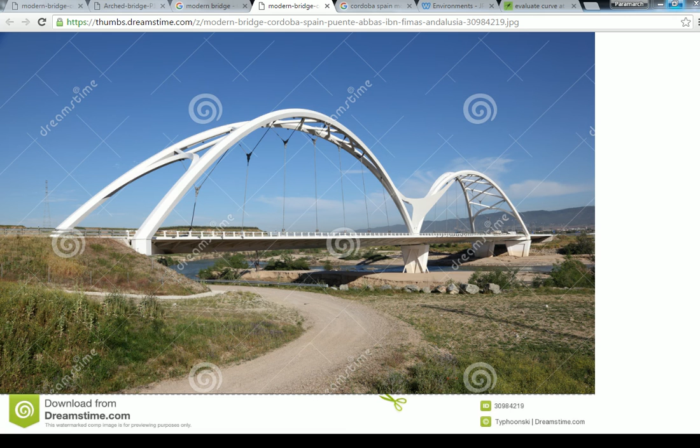All right, next up we are going to start doing the suspension cables. We're going to set it up to have that variable positioning function that we were talking about. So let's get started setting up that variable position. It's a centerline based function because only one point connects at the base.

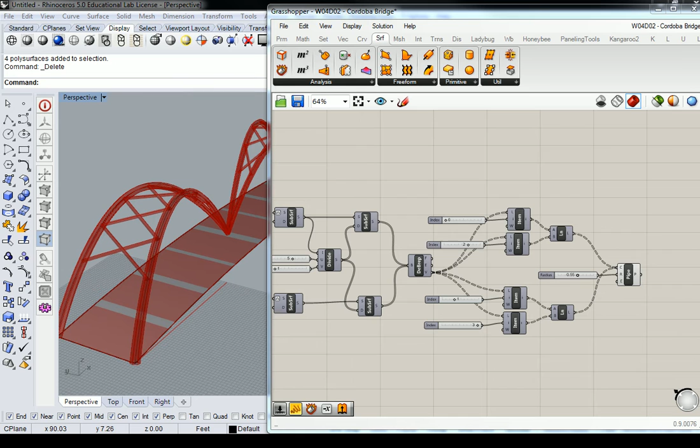However, you'll notice here that we basically have, from the previous exercise, some subdivisions. Notice how this subdivision has a center line. We could isolate it that way if you choose.

However, the reparametrization part is kind of key. So I could do a new subdivision, get both sides, and then reparametrize it and use the center line. Or I could isolate one edge, or one surface, like I did here, and reparametrize that, and then do my series of connection points along the edge that is the center line. Does that make sense?

I might have confused you, but it's going to look like this. If I'm going to use this particular surface, I'm going to use this one in this case, and I'll copy and paste and use another one for the other side. Jump over there - that one's not going to do it, this one will. So these are the two surfaces I'm going to use.

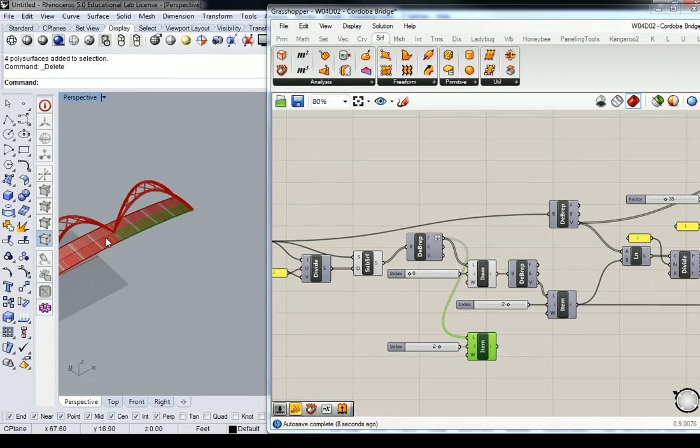For all intents and purposes, I'm going to use the origin side, and I'll call that the west, and I'm going to use the non-origin side, and I'll call that the east. I'm going to reference these surfaces and pull them down below so that I can separate my different ideas.

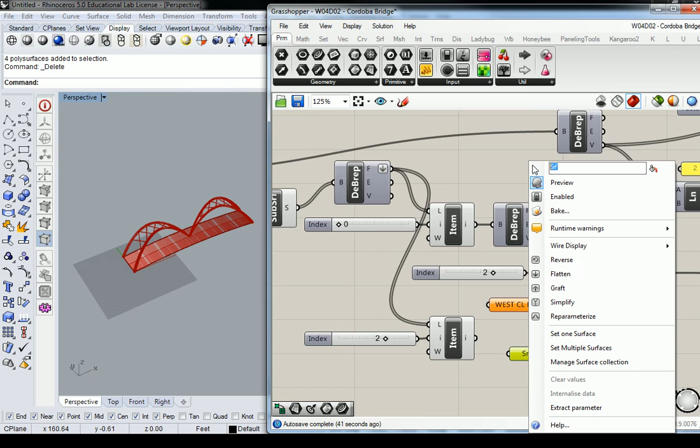So these params, I'm going to call west CL base, for centerline, and east CL base. The west one is this one here, and the east one is this one right here.

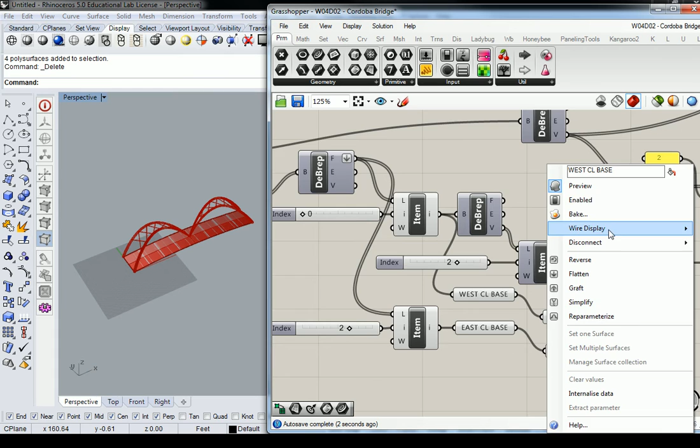And if you care to leave a copy of the information that's flowing out up top, you can. You just need to copy this and then reconnect them and make them wireless. It's a good habit to be in. I don't always do it - for simpler definitions, I don't always do that. And then I'll copy, move these down here.

All right, so brand new idea: east and west. Let's go ahead and start breaking this thing down and getting the edge that we want. Do I want to subdivide the edge first and get my points along the center line, or do I want to reparametrize the surface first?

Anyone? First person to have an idea about it. Do I want to find the edge and subdivide it into points first, or do I want to reparametrize the surface to reduce its size and position first?

Find the edge first? No. Yeah, you want to reparametrize it, and you want to get the position function first, because if you find the edge and you subdivide it, well, you've subdivided it in its original position, meaning the full length. And you might not always want that. You want it to be able to shift back and forth and reposition.

So I'm going to work on both of these at the same time, in tandem, just like I did with the last exercise. So the west centerline base, I'm going to reparametrize that, which means under domain, I'm going to use construct domain squared.

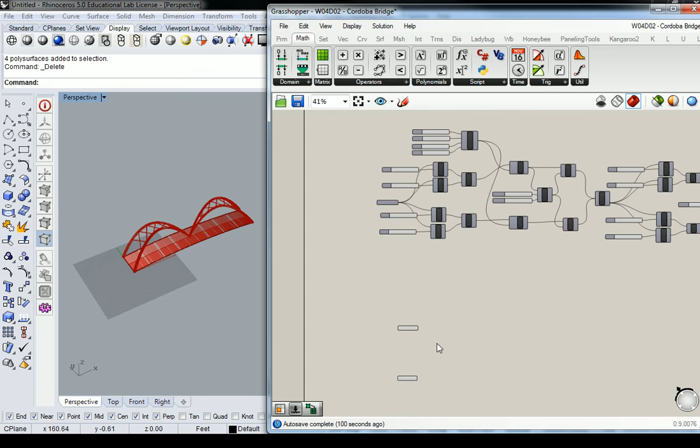In fact, these ones are really annoying to set up, so I'm just going to jump up here and grab this whole feature again. I'm going to move that down.

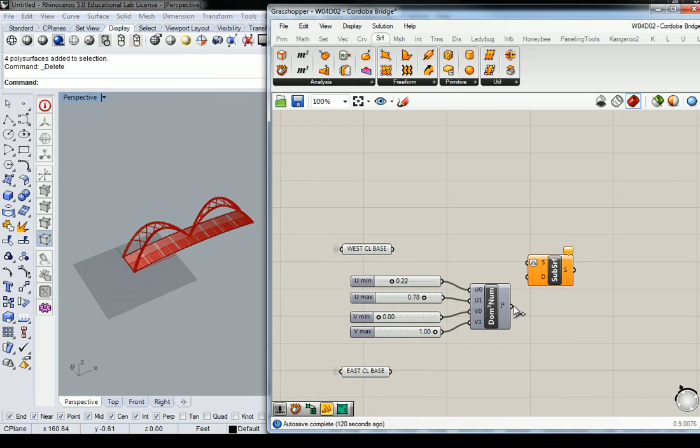And then I'm going to need an isotrim, under surface utility, isotrim. Make sure your surface is reparametrized, so when you plug it in, you can change its position.

Now, remember, the rest of the positions are variable, and the one that's on the outer edge doesn't matter at all where that's placed, but the one that is in the center, which was the 1 value, must be on the center line. Otherwise, you're going to have a misalignment of that particular item. So make sure this is 1.

This doesn't have to be on the edge, but I'm going to leave it there anyway. And position it so that it's roughly underneath the geometry above. So something like that.

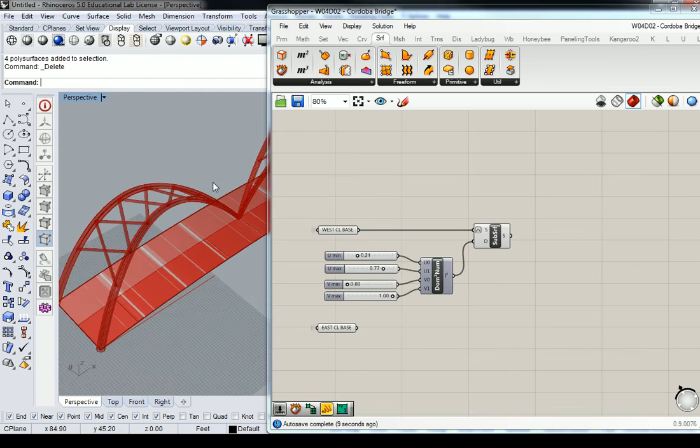And I am going to do the same thing on the other side, but the other side is going to have an inverse U, minimum and maximum. The reason it's going to have an inverse U minimum and maximum is because they face the same direction. So while they're borrowing the same properties, let me select them both so that you can see.

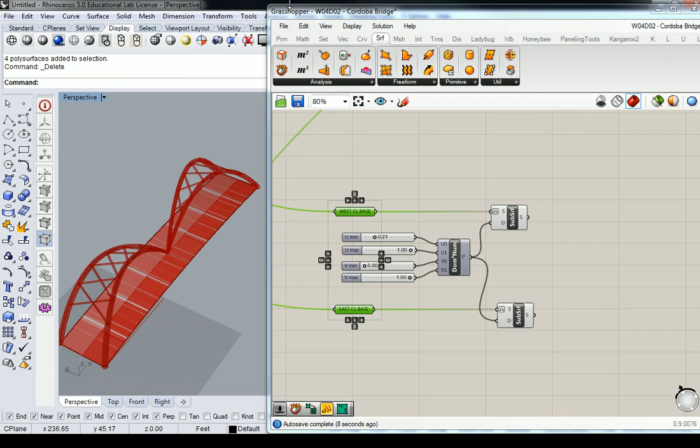If I move them all up, you can see that they're lopsided, right? Can you guys see that? It's a little hard to see on mine. Let me turn a few things off and turn the default layer off.

There we go. All right. So now you can see how they're facing the same direction essentially, right? You understand that?

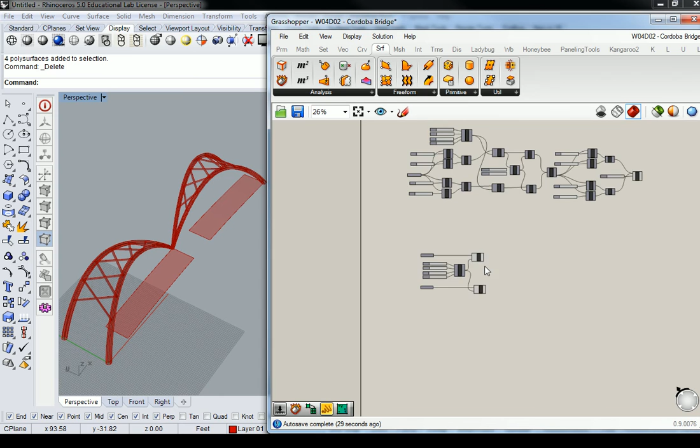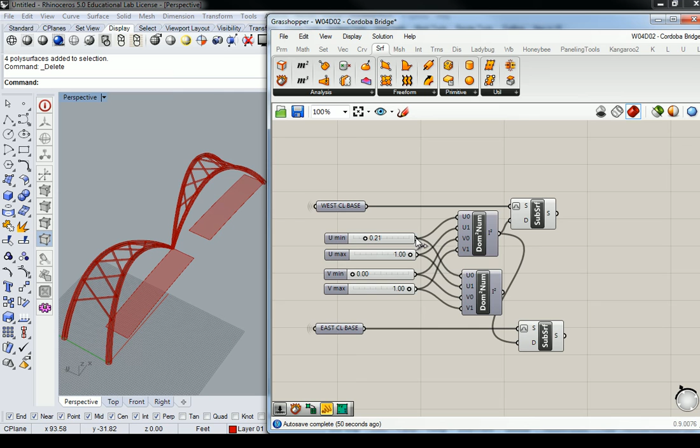So rather than having them share the same one, I'm going to copy this domain down, and I can keep the same properties, except for the 21 and the 1 are going to invert, and then that's going to be my new domain.

Wait a minute, why did I do that? U minimum, U maximum. That's weird. U value of 1. Huh. Are you guys seeing what I'm seeing?

No, so I reversed the U minimum and the U maximum. So the U minimum should be a value of 1, meaning like the inverse - this should connect at the center instead. But it's not, and I don't know why.

Mine was even in the first place. Mine was already even when I plugged it in, and I only have 1. Hang on, let me pause the video.

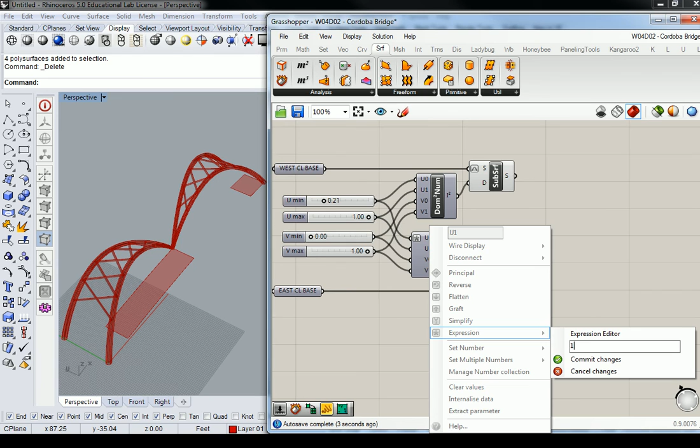Okay, for some reason, reversing the actual number doesn't do it, which is really shocking to me. So instead, I'm going to do a 1 minus x expression on this input. So 1 minus x, and then reverse this one again to a 1 minus x. And that'll give you an even spread going opposite directions.

Yours works without the expression? Oh, that's weird, all right, I don't know. I'm going to chalk it up to one of those things like the offset function going either way in the same definition.

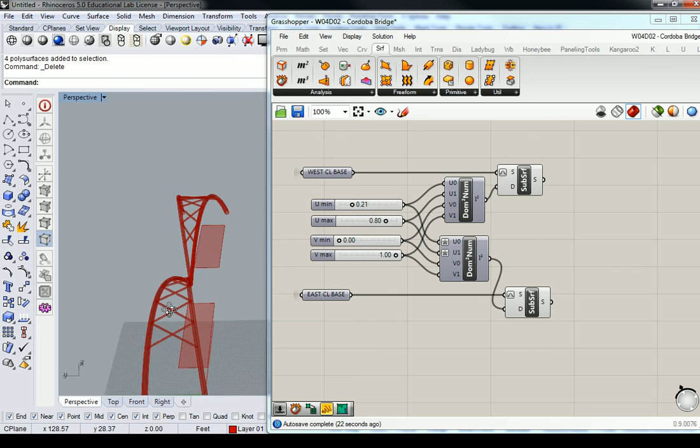Okay, so we have a surface. We have an edge that is aligned with the center line, so we need to find that edge and then subdivide it into points. And the points need to be exactly the same number of connection points that we have, or number of subdivisions that we have, plus 1.

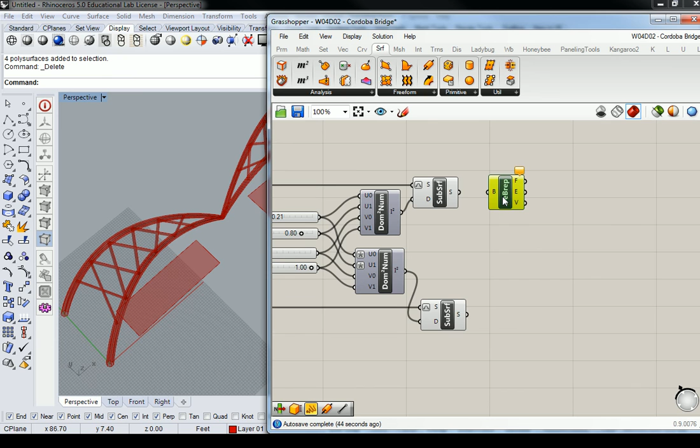So I'm going to deconstruct brep on both of these. Actually, we might - no, this should work this way. Deconstruct brep on both of these, and find the edge using list items.

So we'll go to Sets, List Item, and again this is quadrilateral, so 0 to 3. Plug your edges in, and let's find the one that is on the center line, which for me it's index item 2.

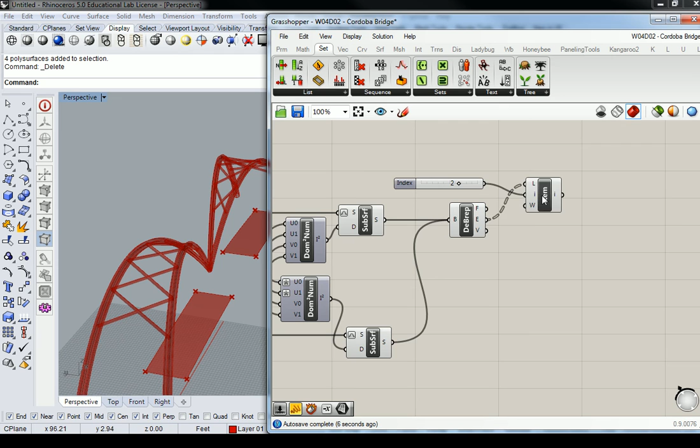And then we take that line and we need to find the number of subdivisions that we have in the structure above, which is this right here. It's a value of 5.

And I'm going to make sure that this is all smart, right? Everything that I change is going to change everywhere and follow and track through. So I'm going to use a parameter of a number, and that would be this 5 right here, and I'm going to call it web subdivisions. And I'll expression that to be +1, so x + 1.

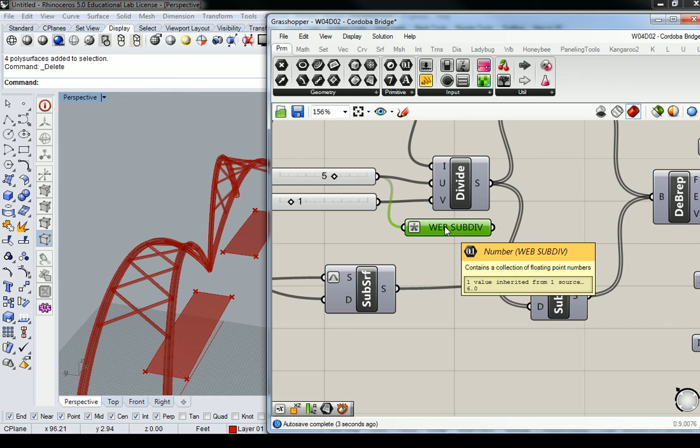You can copy and paste that as well and make that wireless if you'd like - you don't have to make it wireless. So this line is going to be subdivided that number of times.

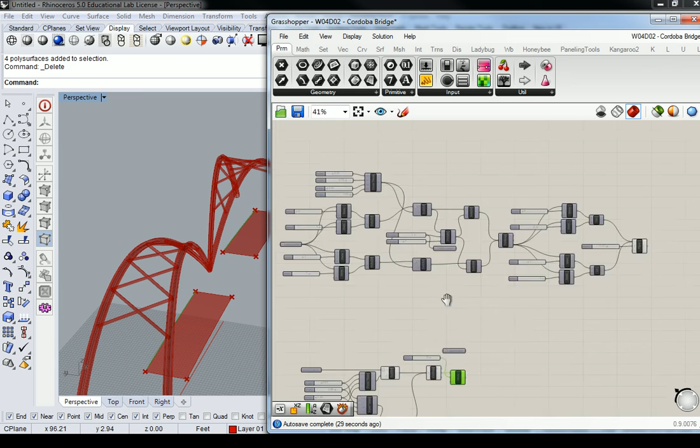Interesting, made a value of 7. 6. Ah, okay, because I copied and pasted it with an expression, so I need to take the expression off the second one.

Alright, so good, 6 is correct, and I'm going to go to curve, division, and divide curve. And I'll take this curve, plug it in, and then the number of subdivisions, and plug that in.

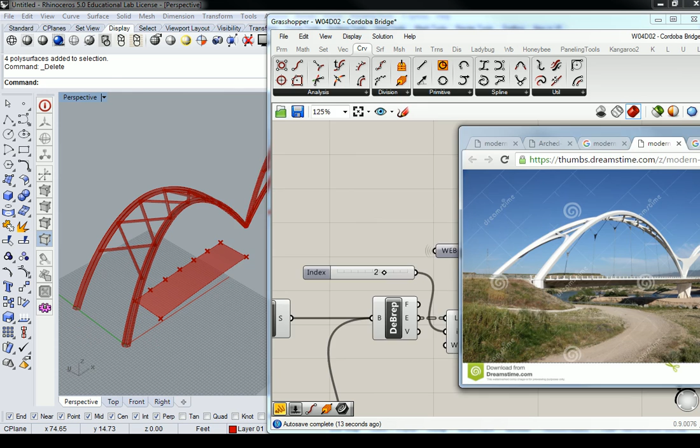So what we need to do here is create the triangulation. And I mentioned before that they have variable depths. So we need to create a triangulation that basically stretches a line from the center point between them - center point between these 2 points of connection.

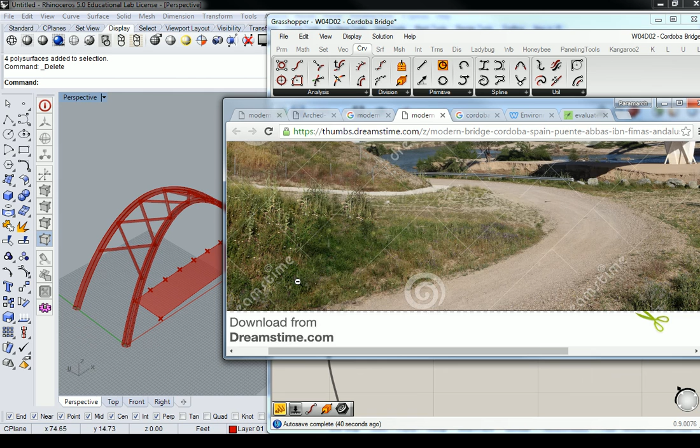I'm going to draw a line. So I need to draw a line between the two, or find the edge between the two, find the midpoint of that edge, draw a line from midpoint to base connection point, and then I'm going to create a parameter, or a set of parameters that have variable distances. But I think I might need to do that in another video.

And yes, I should. Okay, any questions about this right now? Okay.